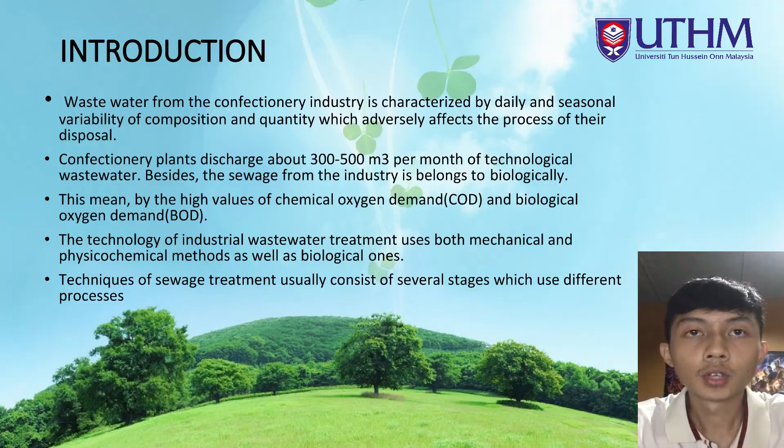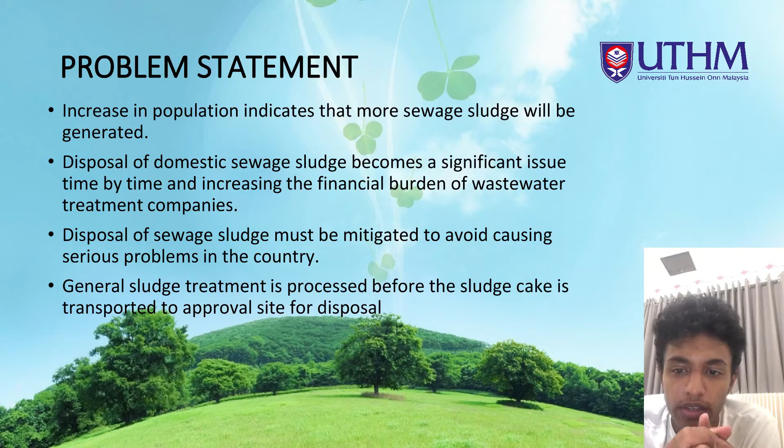The increase in population indicates that more sewage sludge will be generated, increasing the financial burden of wastewater treatment companies. The disposal of sewage sludge must be mitigated to avoid serious problems in the country. In 2020, it is predicted that 7 million metric tons of sewage sludge will be generated annually, up from the current 3 million metric tons.

Malaysia produces more than 4.5 million cubic meters of domestic sludge annually. Since 2005, the volume of sludge produced has increased from year to year. Sewage sludge is one of the largest contributors of waste material in Malaysia.

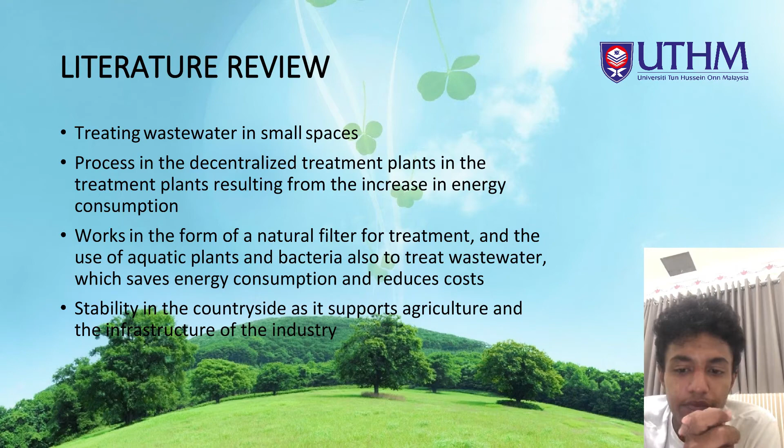Hi everybody, let's take a quick tour talking about the main points related to the methodology and results of this research on water treatment in confectionery industries.

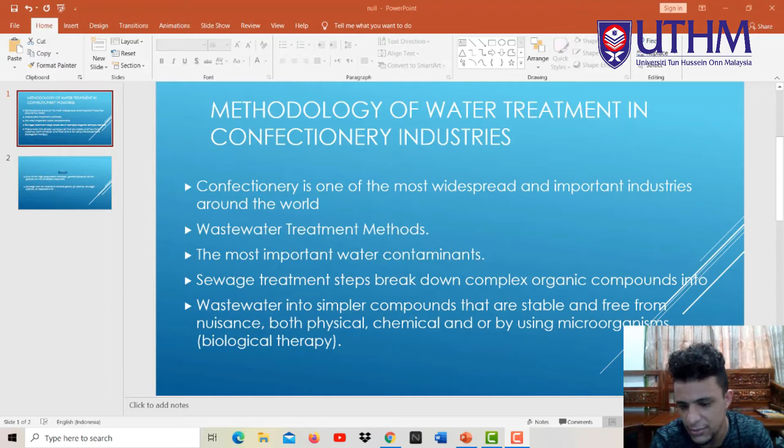Confectionery is one of the most important industries around the world requiring water treatment methods. The most important water contaminants are addressed through sewage treatment, which breaks down complex organic compounds into simpler, stable compounds free from odors, using both physical, chemical, or microorganism-based biological methods.

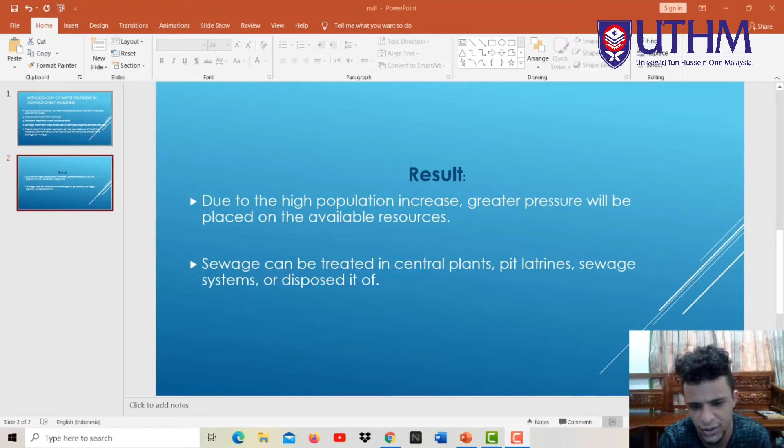Now for the results: due to high population increase, pressure is created on plants and available resources, so treatment and control plants are built with systems to address this.

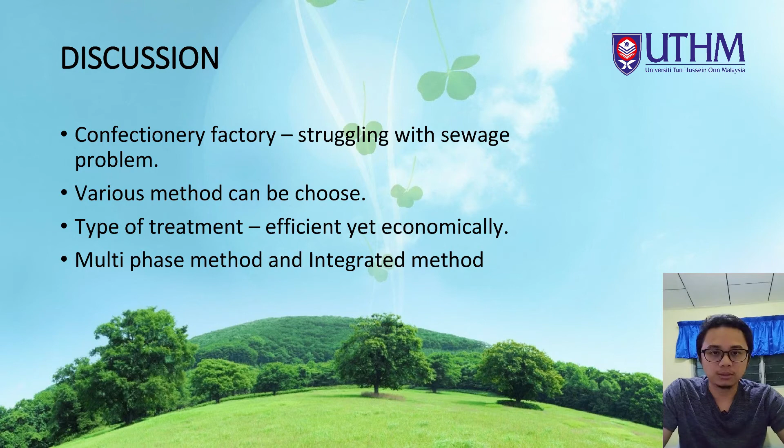As a result, they have found two ways: the first method is the multi-phase method, and the second is the integrated method. The multi-phase method, as its name suggests, consists of several stages, each with its own type of treatment.

An advantage of this treatment is that it will improve the quality of parameters. This treatment uses several stages or types of treatment such as sedimentation, chlorination, aeration, sand filtration, and activated carbon.

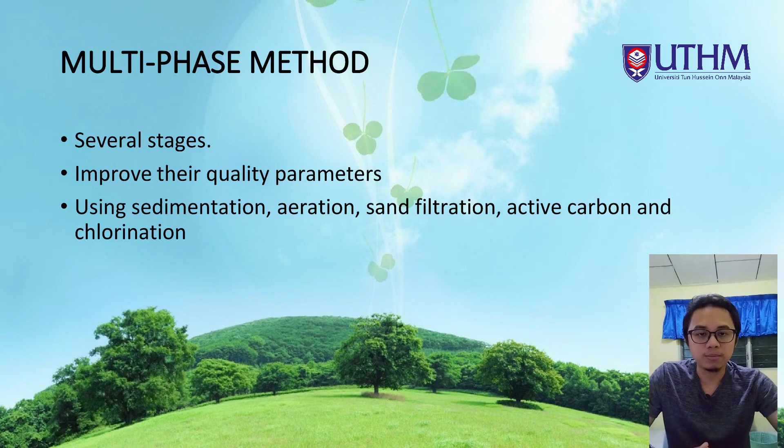The second method is the integrated method. An example of this is the membrane biological reactor, which consists of classical technique combined with a pressure membrane method, where the membrane layer can act as an absolute barrier to defend against suspended matter and organisms.

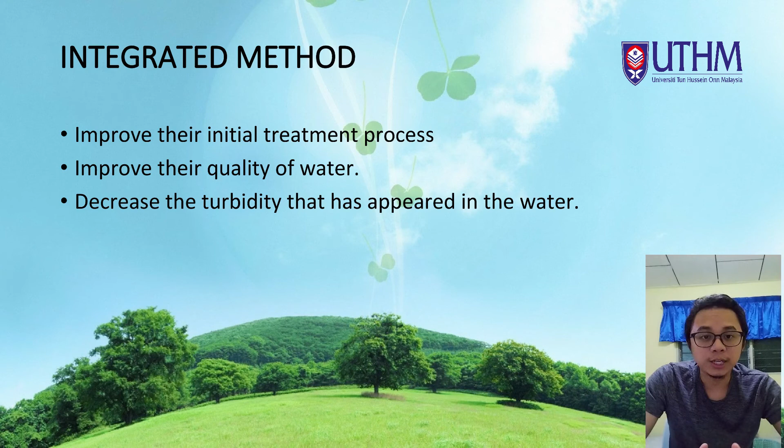The advantage of this method is that it can improve the initial treatment process and the quality of water, and also decrease the turbidity value in the water.